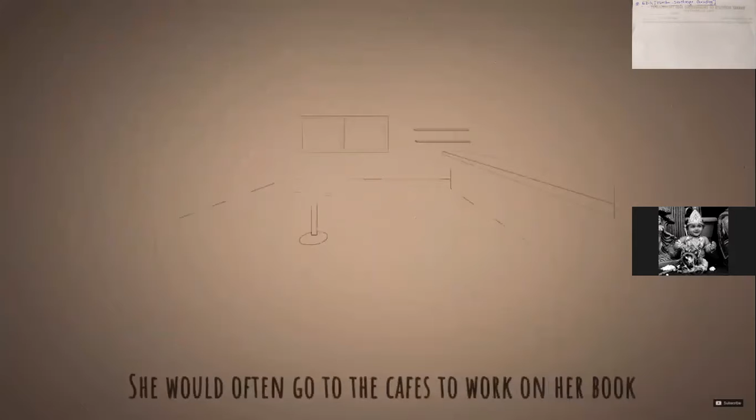To write fantasy novels. She would forget about everything while sitting at her desk, and so she started writing more and more. She would often go to the cafes to work on her book while her child had a nap. Although she couldn't even afford food at the cafe, she only ordered one cup of coffee during her writing sessions, just so the cafe owner wouldn't kick her out. Somehow this way she finished the first 3 chapters of her novel.

She sent the story to a publisher, but unfortunately, they quickly gave her a pass. She sent it to another publisher, but again, the answer was no. Her mailbox was filling up with rejection letters. After sending her story to 12 different publishers and getting rejected by every single one of them, she began losing confidence in her book.

Finally, one day, the editor at Bloomsbury Publishing Company sat down to read the story. Fortunately, her 8-year-old daughter was there too. The little girl loved the opening chapters, and she was very curious to read the complete story. This made the publisher agree to publish her book, but the publisher also advised her to find a full-time job and said that she wouldn't make any money writing fantasy stories for children.

In June 1997, at the age of 31, her first novel, Harry Potter and the Philosopher's Stone, was published with an initial print run of 500 copies. When readers tasted the story, the demand for her books began to rise dramatically. 5 months later, her book won its first award, the Nestlé Smarties Book Prize.

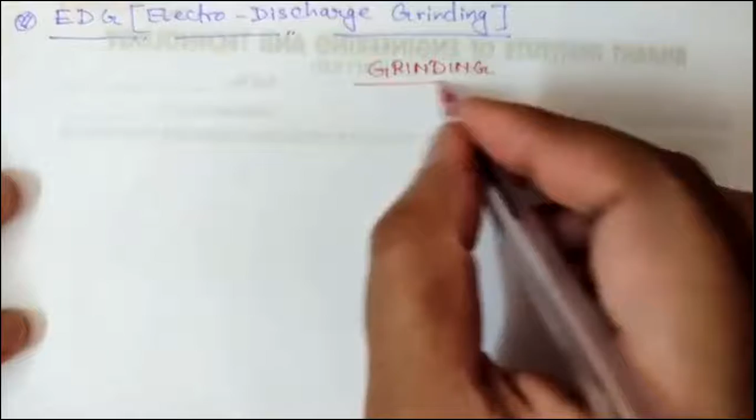Okay, so then you will get this answer, right? So if we talk about grinding, we can classify it into two categories. One is conventional, another one is non-conventional.

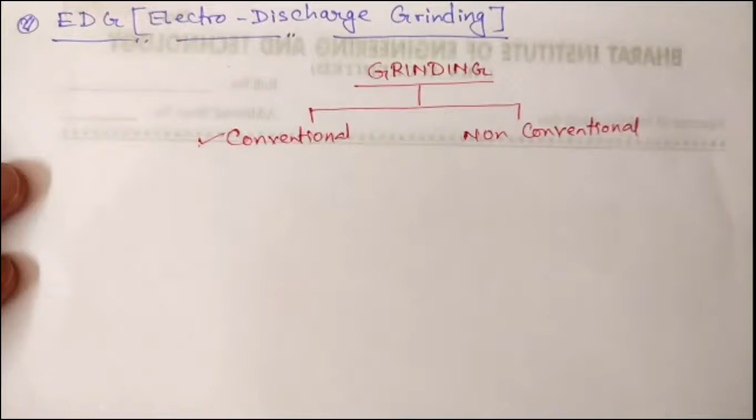Now, in conventional grinding, already you have studied in the previous semester that we have different types of grinding processes. You might have already studied about the grinding wheel, as well as the specification of the grinding wheel.

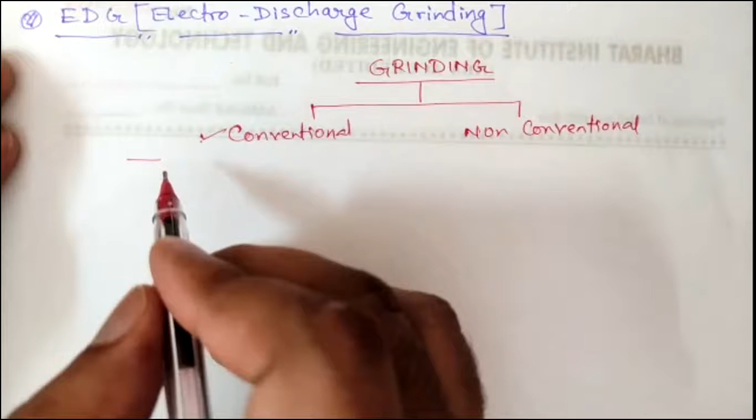Like you have studied about surface grinding machine also. I feel you people studied it, yes or no? Hello? Anybody? Can anybody tell? Sir, your voice is low. Can you hear me now? Hello? Yes, sir, so did you study about conventional grinding process? Have you studied?

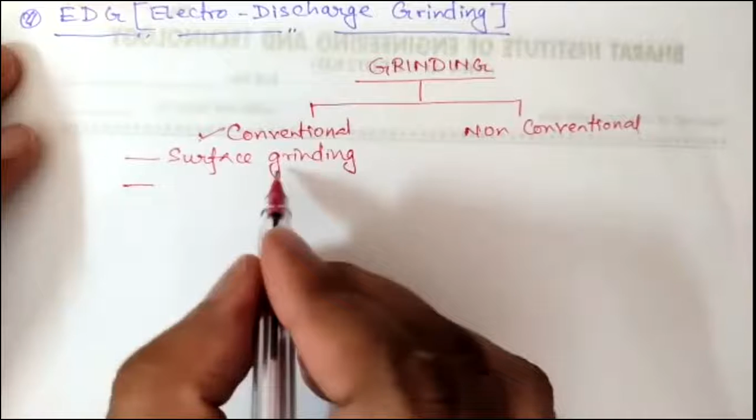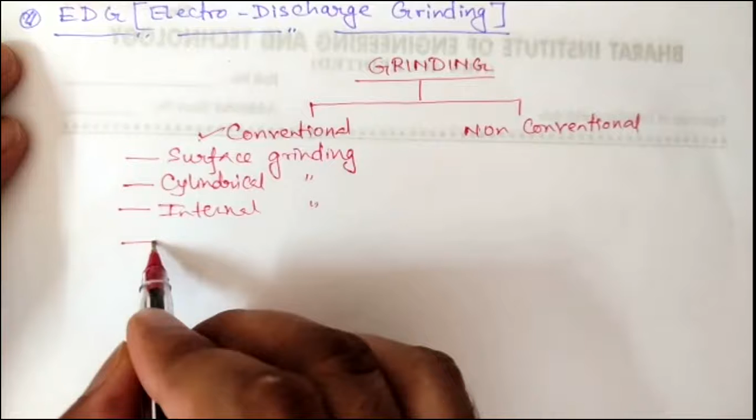So in conventional grinding process, which you people might have studied in previous semesters, we had surface grinding, then cylindrical, then internal grinding, then something called centerless grinding. Did anybody know centerless grinding? Did you study it? It is a very important question for your interviews. Then many are there like gear grinding, contour grinding, thread grinding, etc.

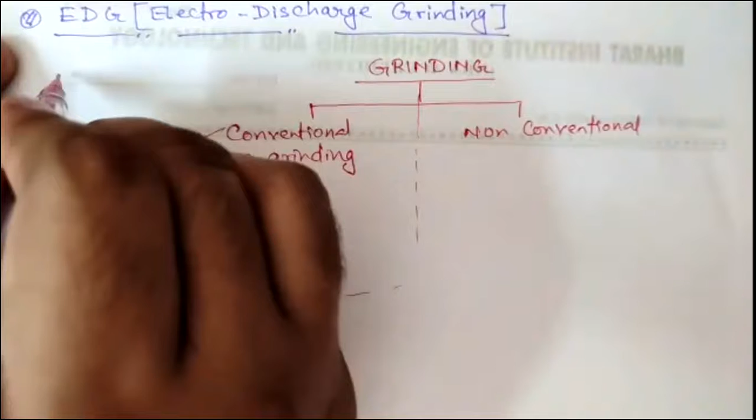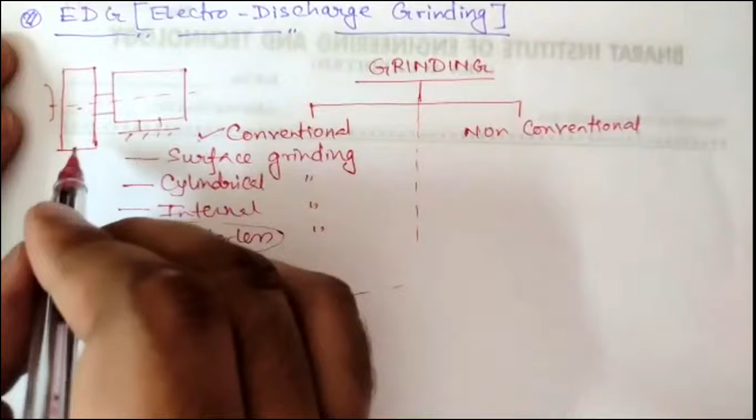Many are there. So in those processes, we found that we have one grinding wheel, and we connect this grinding wheel with one motor. Once the motor is rotating, this grinding wheel also will rotate, and we are going to place any object.

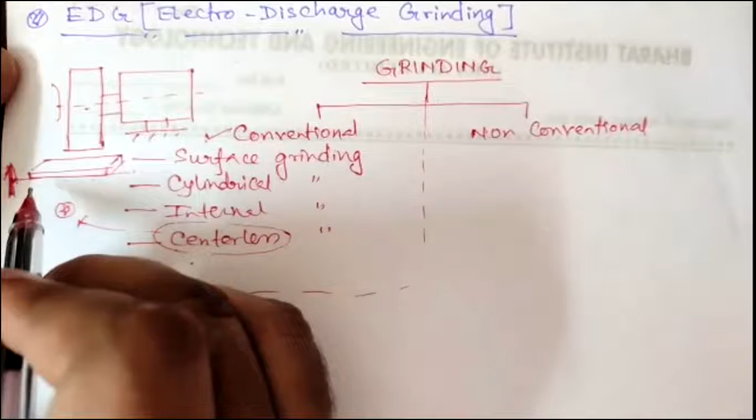Say in case of surface grinding, we are going to place a workpiece, and we are going to fix it with some fixtures, and then keep it on a table. This table will have some feed mechanism. By bringing the table up or moving it up, this surface will be in touch with the grinding wheel, and in the grinding wheel there will be many abrasives present, which will start removing material from the top of the workpiece in the form of powders or debris.

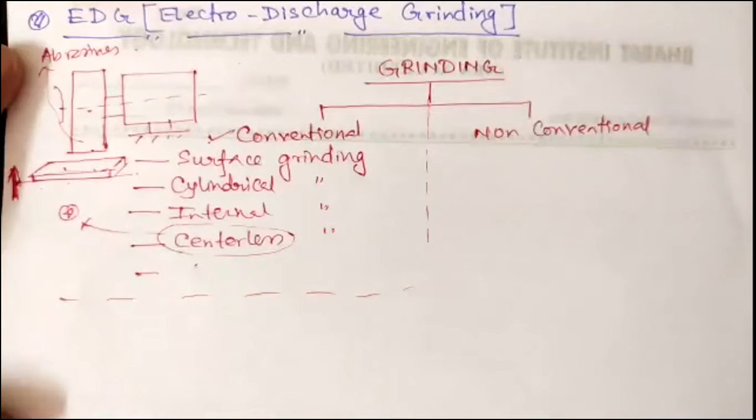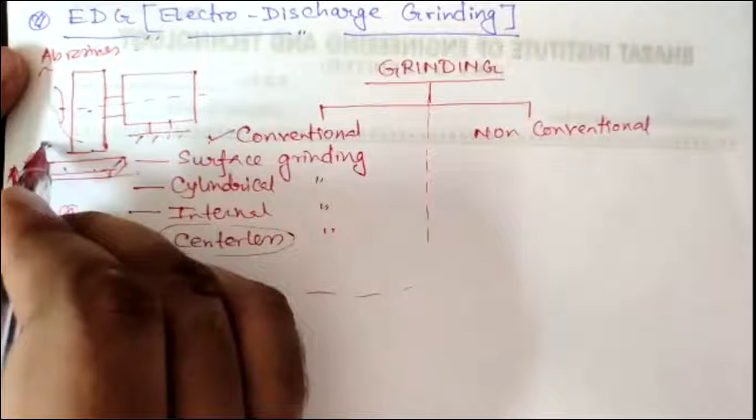And in this case, we found the material removal rate was also very low, as we are not going for direct machining process using single or multiple point cutting tools. It is mostly used for finishing operation. So those things we might have studied in grinding. Now, this table will have XY feed as well as Z feed. These things you might have already studied in previous semesters when you studied about the machine tools subject.

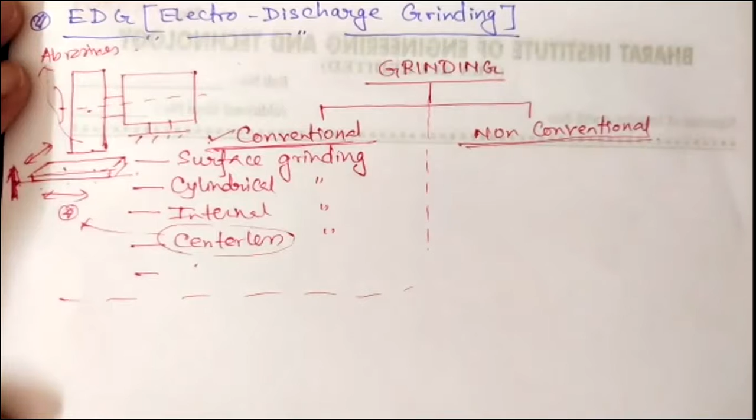So these all are about conventional processes. But there are some non-conventional techniques also, where we use a grinding wheel attached with some non-conventional or unconventional machining system. This is sometimes called hybrid grinding also. What did I say? Hybrid grinding.

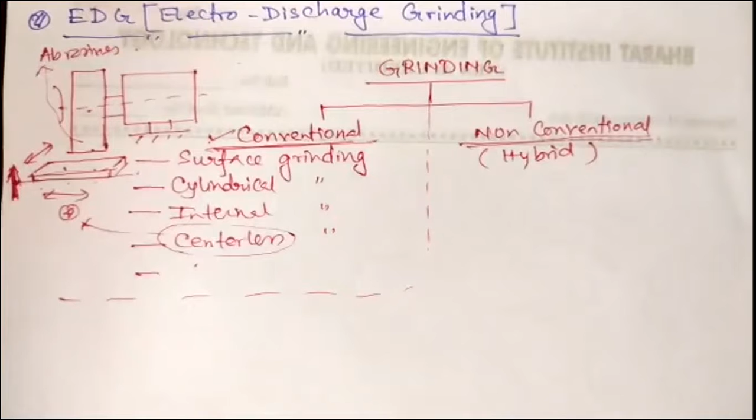Now what are the different hybrid grinding systems? I have already discussed that there are many hybrid grinding systems. So in hybrid grinding system, the first one which we have studied this semester is ECG, or electrochemical grinding process. Now after electrochemical grinding process, ECG, we have got EDG also, that means electric discharge grinding process also.

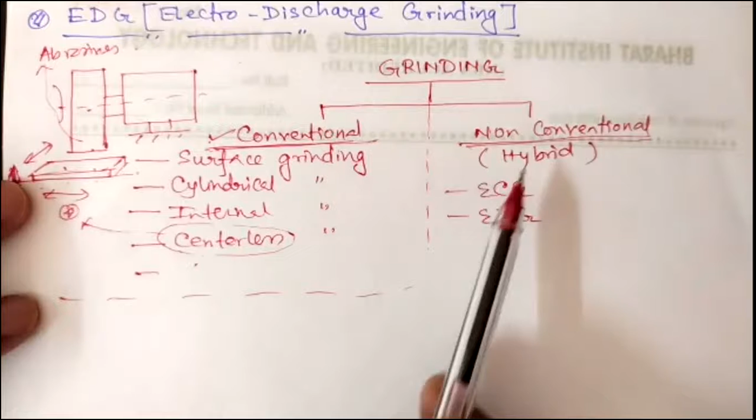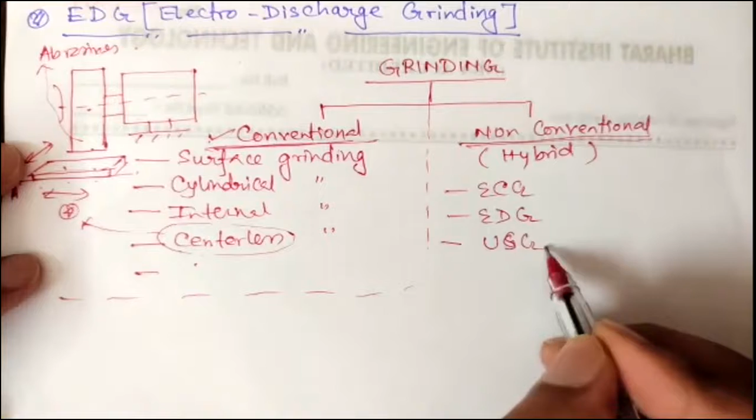So in hybrid grinding process, we will have the mechanical kind of grinding process along with any non-conventional energy source. So as I said, we had ECG. Then we have EDG. Then we have got USG, ultrasonic grinding, that is also possible. Then here only in EDG, another one is there, called EDDG, that is electric discharge diamond grinding. So these kinds of things are there.

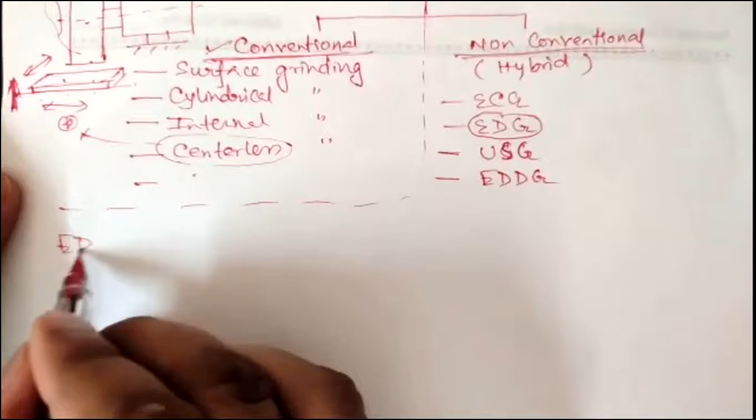Now we are going to study about EDG, or electric discharge grinding process. So EDG, or electric discharge grinding, is the process which works on the same principle as EDM.

So here we are not going to have the tool like we used in normal EDM process. We are going to use a grinding wheel, or rotating wheel, which will be made of electrically conductive materials. In general we use graphite in place of tool, right? Now a part of the grinding wheel and the workpiece will be immersed in the dielectric and will be connected to a pulsed DC supply.

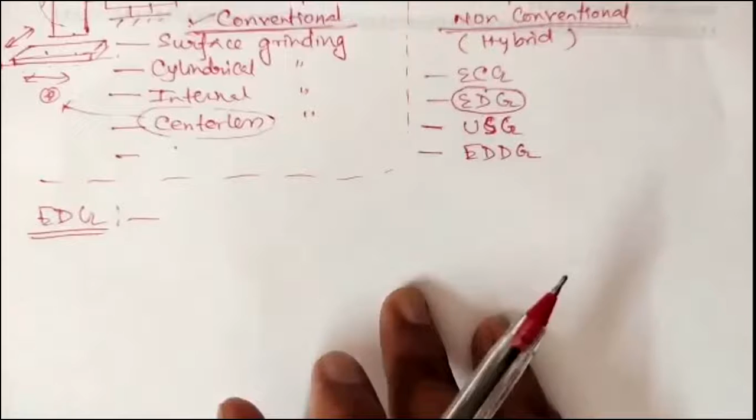Now let me draw the circuit diagram of EDG, and then we will be able to discuss it. Anyhow, I'll finish some discussion on this page, and on the next page I'll draw the diagram, so that you can understand it in a better way.

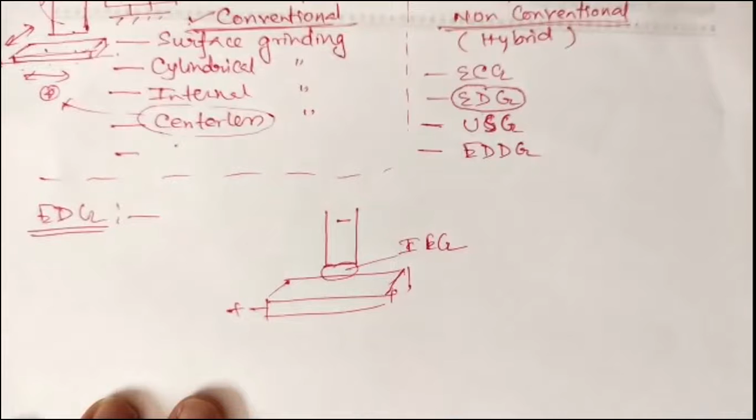So what we found in EDM is that we had a tool which was connected to the negative terminal, and we had a workpiece which was connected to the positive terminal of the power supply, and here we maintained some interelectrode gap, IEG. And the mechanism I have already said, that electrons will start moving to this side, and here we'll have presence of dielectric.

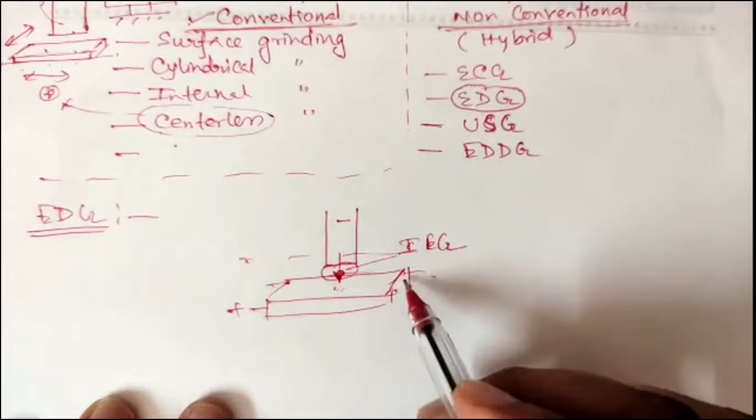So these free electrons, which are moving, will be ionizing the ions present in the dielectric fluid, and will make a plasma channel, and hence it will allow the electrons to flow in this direction, and that will strike on the surface, and generate some heat, produce some heat, and then it will melt the workpiece and vaporize it. So these things I have already mentioned in the EDM process.

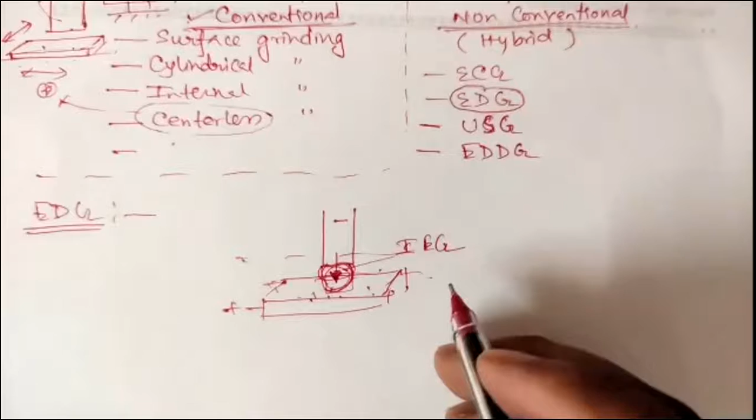So here also we are going to have the same kind of thing, but in place of this conventional tool, we are going to use some grinding wheel. Why do we do it? Whether we require any sort of abrasive to be present on the grinding wheel or not, that also we are going to study.

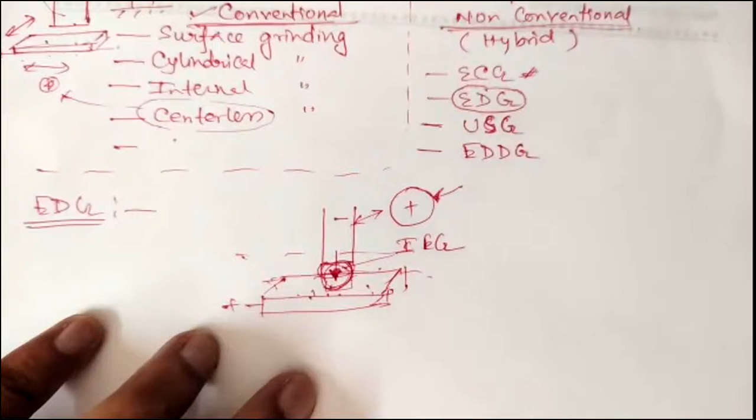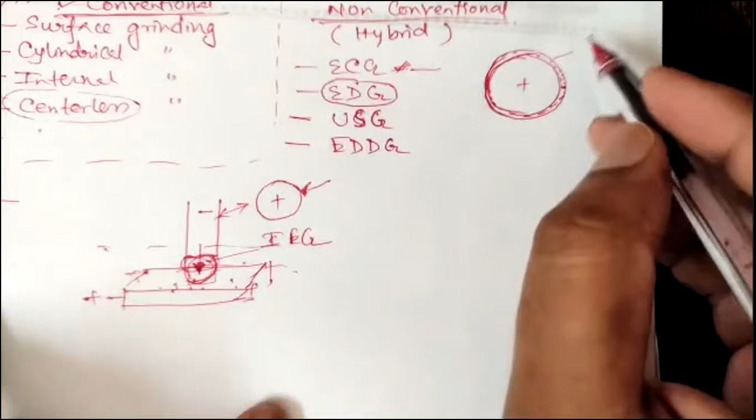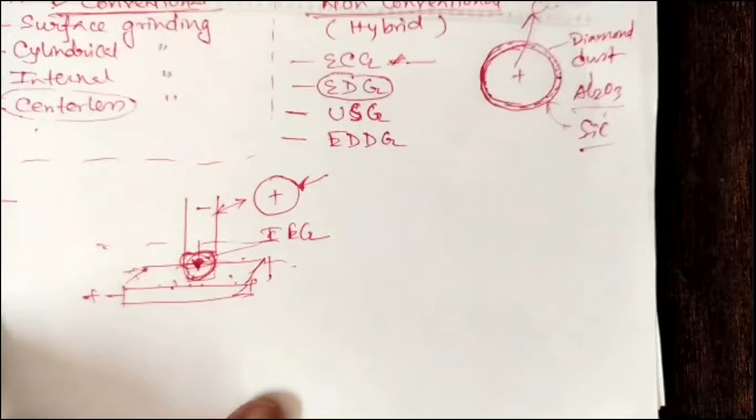And this insulating chamber was filled with some abrasive particles like diamond dust. Then we had Al2O3, etc. So these kinds of things, silicon carbide SiC. So these abrasives we have kept on the outside of this. That means this was made of conductive materials, because in this ECG process also we require electricity to be passed, or there should be some flow of electrons. Otherwise it will not work. So this process we have studied in ECG.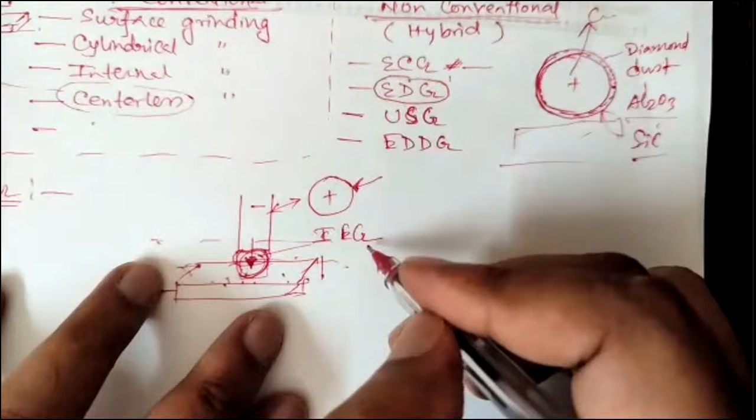But in case of EDG, we are going to have a similar kind of grinding wheel, which will definitely be made of electrically conductive material. But in this case, we are not going to use any kind of abrasives. Now you will be asking, sir, then how does it become a grinding process? In the previous case we used some abrasive particles, but in this case there is no presence of abrasives, and still we are calling it grinding.

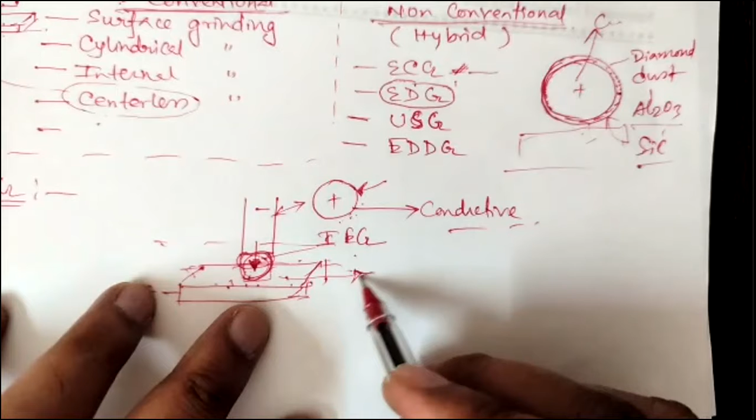In case of EDM process, the material removal was very low. Materials in the form of debris were coming out from the workpiece. So in this case, whether we are going to have more MRR, less MRR, or similar kind of MRR, then why is it called grinding? Just because we have used one wheel in this case, like a grinding wheel.

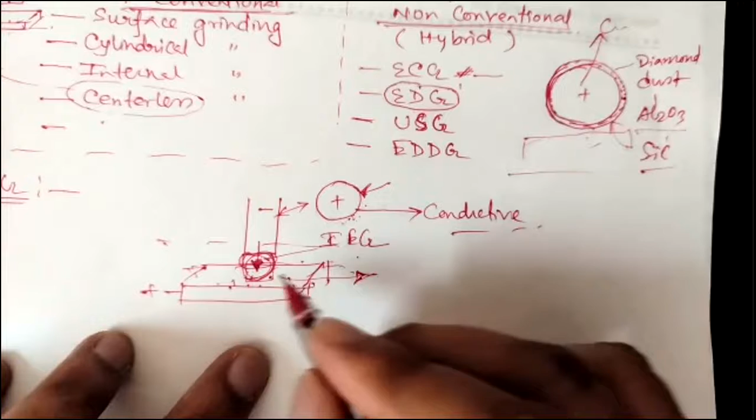So in this case also there is no much difference. But one difference is, in the previous case we have used some flushing mechanism, so that the plasma channel will be broken, and from here everything will come out or be flushed out, which is a very important property in case of EDM. This thing I have discussed already.

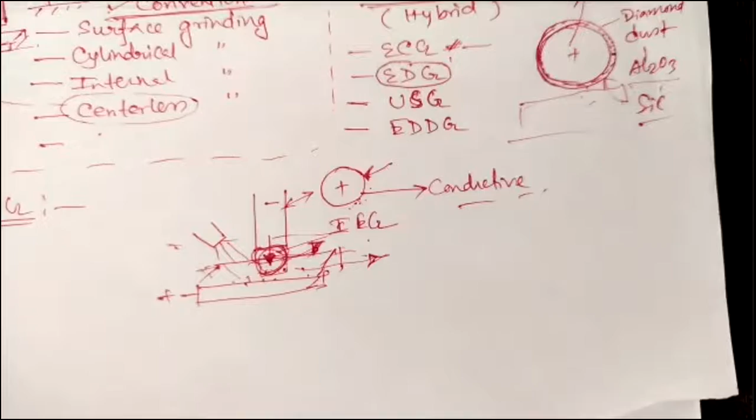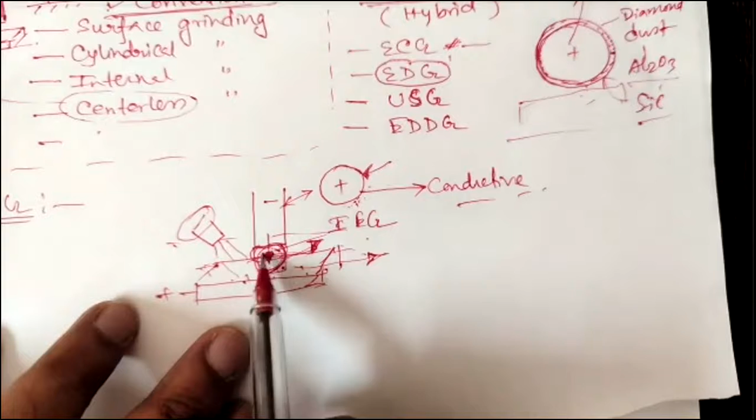So flushing plays a very important role in EDM process. But here, in case of EDG, we are not going to use any flushing mechanism. Then you will be asking, sir, how are we going to replace these things, or flush away all these particles if there is no flushing technique? So in order to achieve the flushing, we have produced this grinding wheel. So this grinding wheel will not only rotate, it will act as a supplementary of the flushing mechanism.

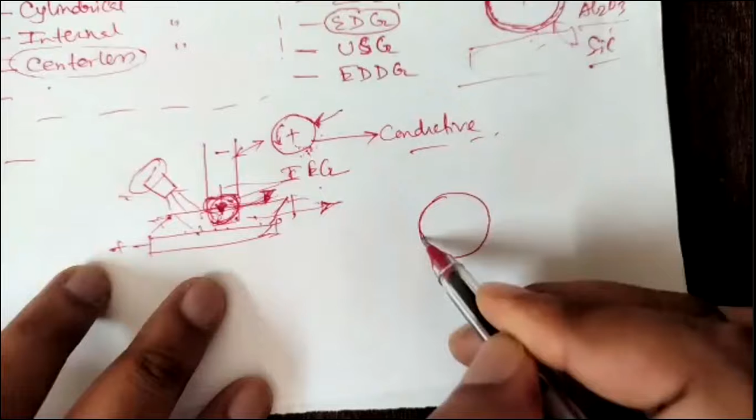Now let us try to understand how it does this. Suppose this is one wheel, and in the wheel you have got some threads kind of things like gear teeth. Now here we have the center of the wheel. Now what you have to do is keep one chamber, which will be filled with some liquid. Then immerse it on it, not fully, partial immersion, like this much. This much portion is immersed already.

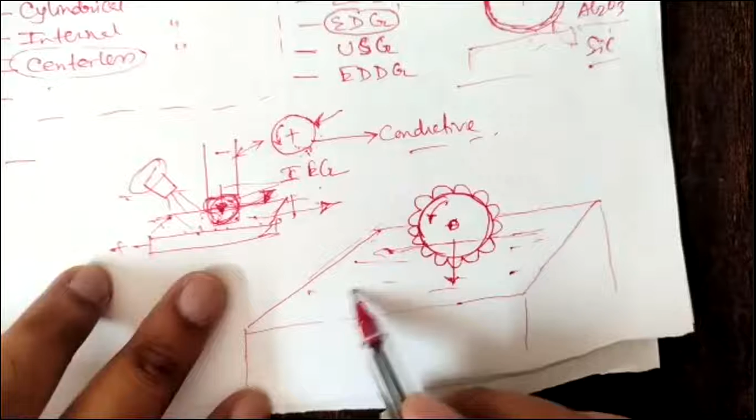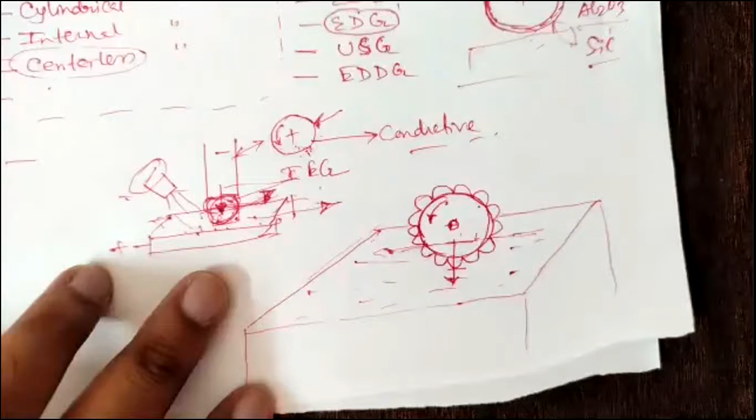Now, if we rotate it, what will happen? Can anybody say? Suppose here you have got water or any liquid. And you have this kind of profile on a wheel, and you are immersing it just a little bit, this much amount, for example here to here, onto the liquid. And you want this wheel to be rotated either in this direction or in this direction. Then what can you find, or what will happen in this passage? Can anybody say? Can anybody respond?

Actually, this one I was simply discussing, I'll draw a big diagram only. Okay, someone has already told more size. I'll draw it. So in this case, what will happen? Can anybody respond? No response. Anybody listening to the class? Yes sir, you're listening. Only you will be listening. Listen, Manideep.

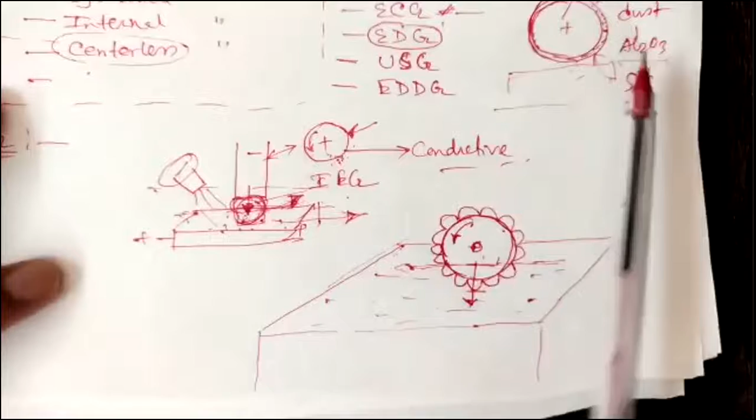Okay, Manideep, you tell what will happen in this case. You understood? Say here you have got some water. Now you have got a wheel which has got some thread twist like this, and the wheel is rotating in this direction, say anti-clockwise direction. Then what will happen? Can you tell?

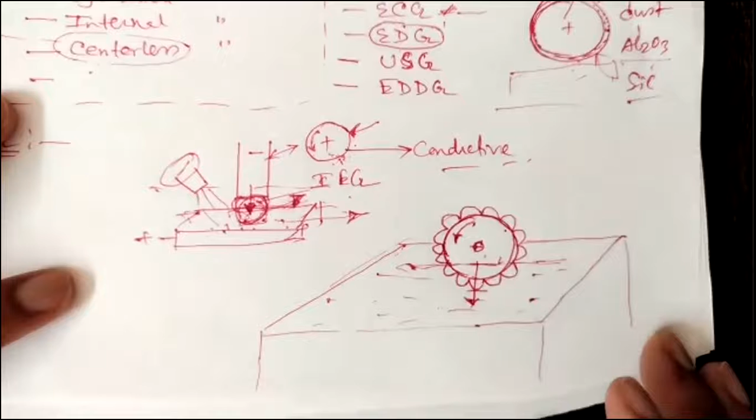This wheel is a grinding wheel, no sir? Forget about grinding wheel, any wheel. Forget about grinding. Some wheel, okay, I am rotating it and I have immersed it into water. Then what is going to happen? The water is going up, sir. Some amount of water is going like this, if in this clockwise direction.

I have shown it is anti-clockwise direction, in this direction, say it is rotating. Yes sir, the wheel is rotating anti-clockwise, no sir. So water, some particles of water, is going in a clockwise direction. Particles of water will go in clockwise direction.

If you have anything with you, suppose some rotary type of thing in your hand, just try it. Take a mug of water or a bucket, take some water and then rotate it. Will you not have some automatic flow of water in this direction, or will the water start to flow in this direction or not? Tell me. I am rotating the wheel in anti-clockwise direction. Yes sir, water will flow in this direction. It will happen, water will flow. Yes sir, water will flow, sir.

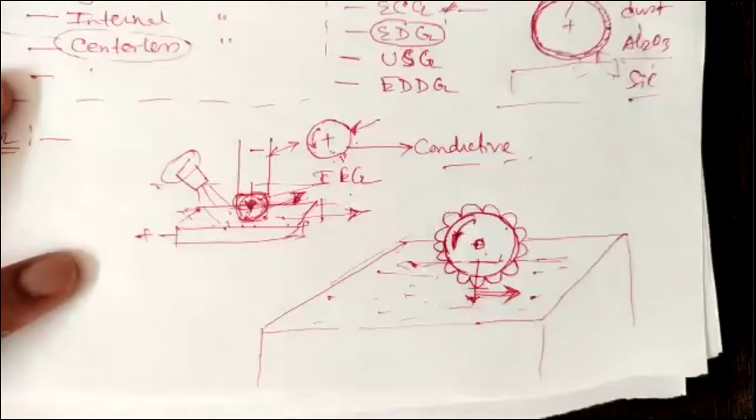But I want this only, so this change you will observe. Don't go in deep, this is a very simple thing. I have some water, now in that water you have immersed a wheel, or something which can rotate, and then you have given some rotation. What will happen? The water will move in this direction, it will start flowing. Yes sir. Now in this case, what did we do? If any plasma channel is formed, what was happening?

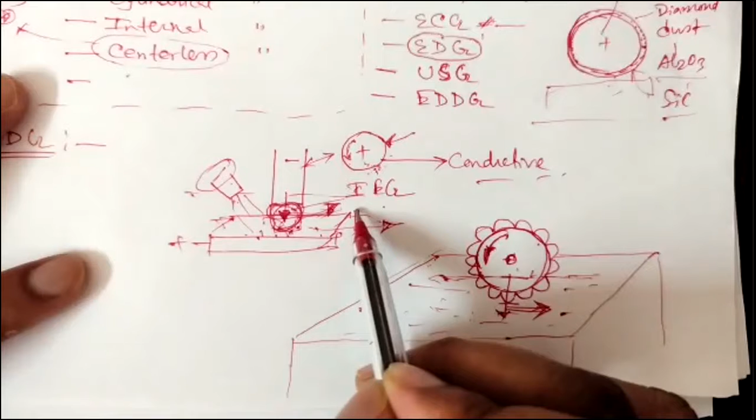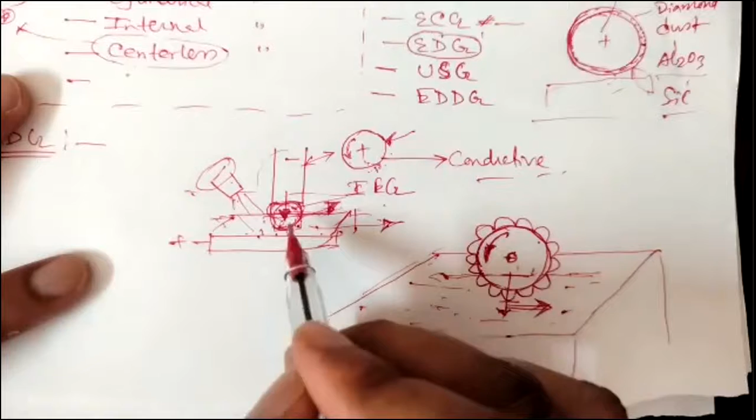This flushing technique, where we use one nozzle, was flushing away all these machined particles, because here we don't have any other mechanism. But if we place one wheel here, rotating either clockwise or anti-clockwise, what will happen? Automatically the dielectric or all these particles will be flushed away. This is the difference you will observe between EDM and EDG.

Now I will draw the schematic diagram of EDG, and then one by one I'll explain once again.

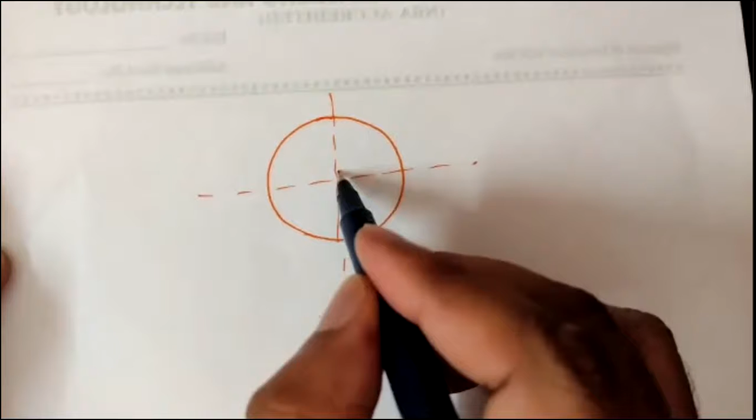So first and foremost, our requirement is to have a wheel, a grinding wheel. Then the second requirement is we must have a workpiece.

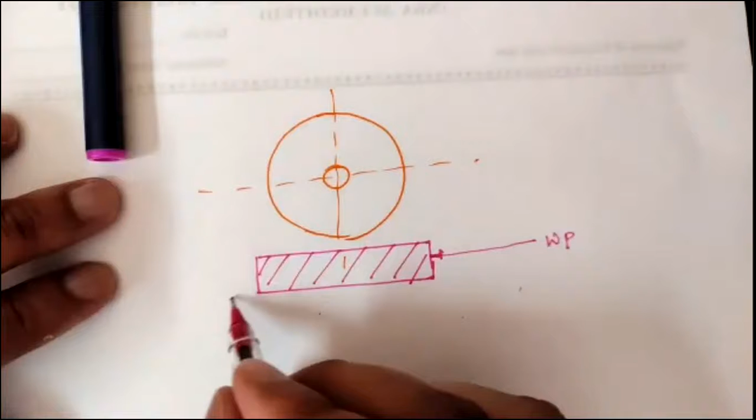In exams, it is very important that you draw all diagrams neatly and cleanly. This workpiece will be mounted on the table with some fixture. So this is the table, or work table.

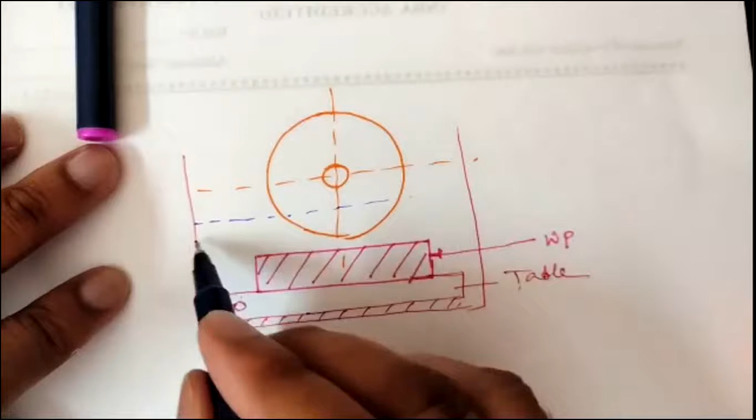Everything must be immersed into a dielectric medium. So we are going to have some dielectric present on it. This is the dielectric.

Now what next? This wheel, for rotation, must be connected with some rotary mechanism, maybe a motor. So we will have a rotary mechanism.

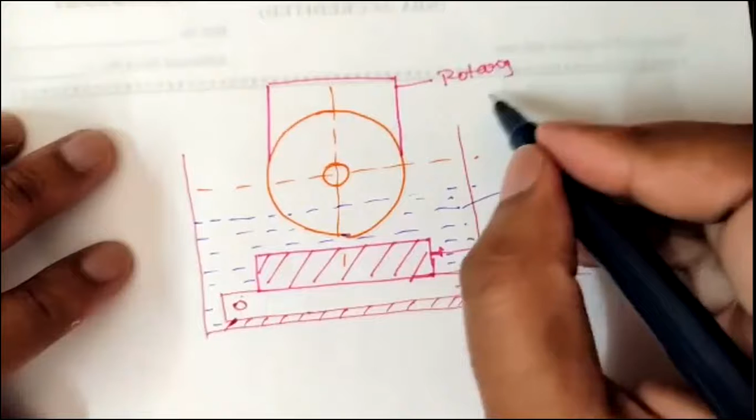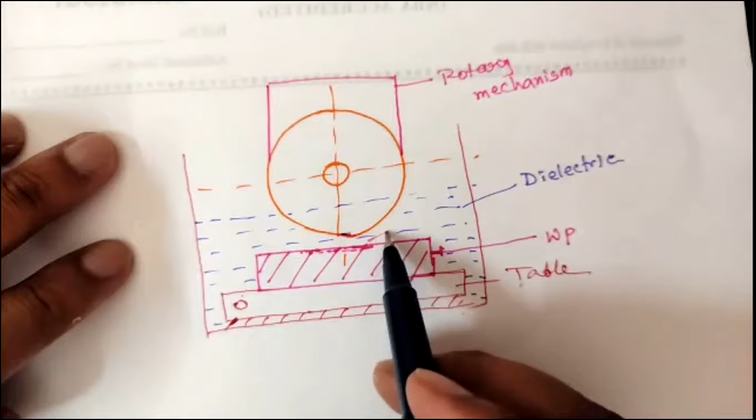It should not only rotate. It will be removing some portion or amount of particles, some debris, and some material from the workpiece. Then the next layer has to appear. So for removing that next layer, we need to maintain the same inter-electrode gap, IEG.

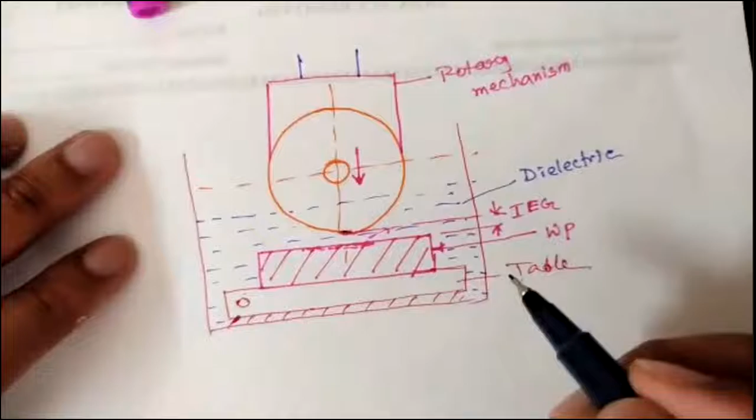So in order to maintain that gap, what we need to do is give some feed to the tool, that means the grinding wheel. To perform this, you have to connect it with some feed mechanism, and to feed it correctly, you need to install some servo system which will have this up and down motion.

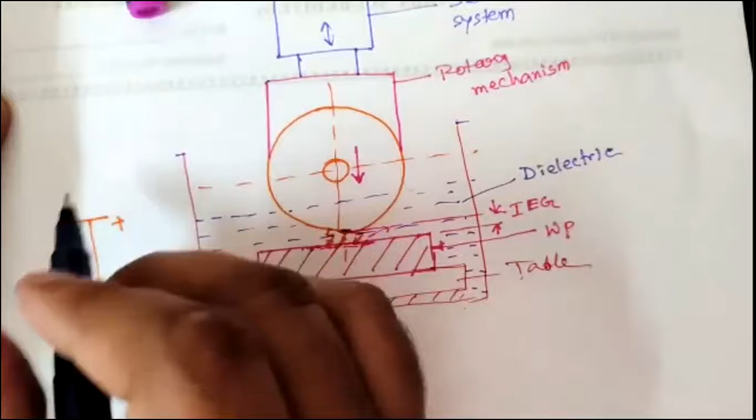Now everything we require, we have mentioned. Spark generation will be taking place here, somewhere here it will generate spark. Now, in order to generate spark, our goal is to connect the table or workpiece with the positive terminal of the DC power source, and the grinding wheel with all the mechanism must be connected to the negative terminal of the power source.

We are assuming here that the grinding wheel is rotating anti-clockwise, but that is not necessary — it can rotate clockwise too. So here we have the unit, which is the pulse generator.

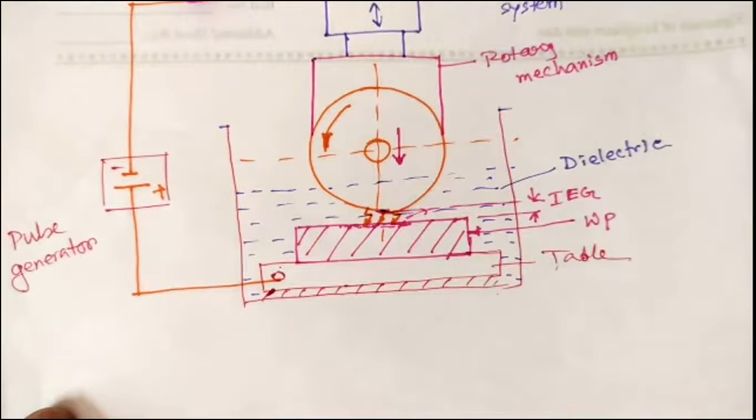Clear? Now I hope you people have drawn this diagram, or shall I wait for some more time? Once you have finished drawing the diagram, then tell me.

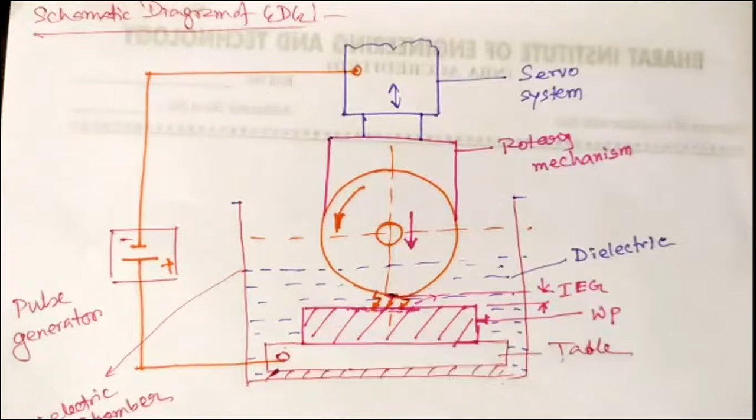Yes, the table will be fixed to the dielectric fluid chamber. This is the dielectric chamber, the table has to be fixed. Actually, this will be the complete setup we will be having.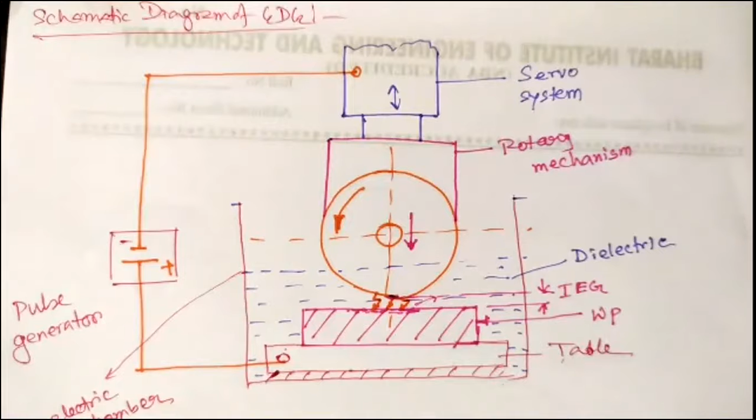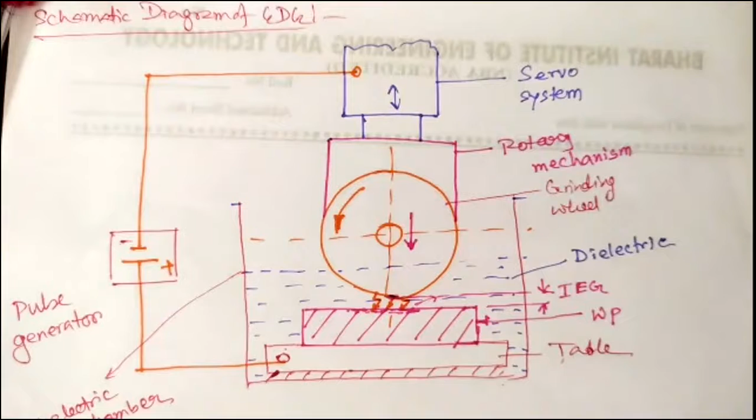Once you finish drawing the diagram, then inform me. I hope you people have finished it. Okay, right.

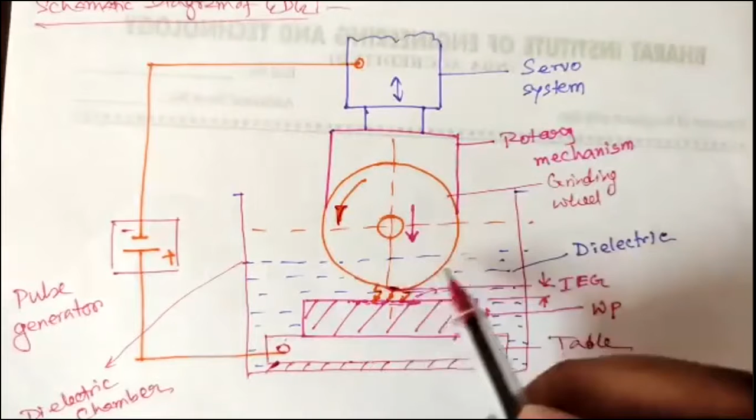Initially the dielectric is not flowing at all; it is simply kept in this chamber. Now, as I said, once the wheel starts rotating, it will start giving flow to this dielectric in this direction. So the dielectric will move in this direction, and this flushing work it will do automatically. The remaining working principle is the same as I mentioned.

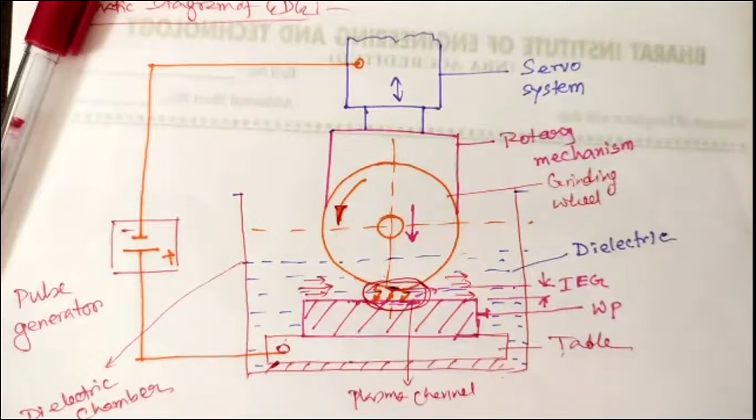So in this zone, we are going to have a plasma channel. This rotating motion of the wheel will ensure the effective flow of dielectric in this inter-electrode gap, and hence the flushing of the gap with dielectric medium can be eliminated manually — that's the previous mechanism I already mentioned.

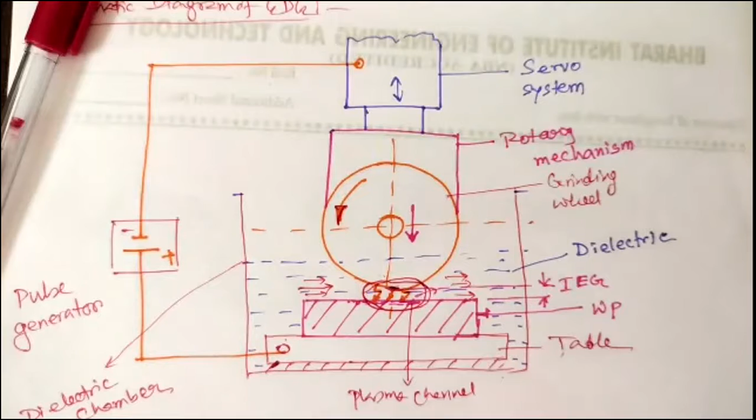But here we can find that there is no direct or physical contact between the tool and workpiece, and because of that, fragile and thin section workpieces can be easily machined.

EDG is somewhat economical compared to conventional diamond grinding. When we go for conventional diamond grinding, it's for harder materials. But as mentioned in previous classes, in EDM or EDG, irrespective of hardness, we can remove materials. So we can remove the diamond wheel — diamond is not required in this case, which saves the cost of machining.

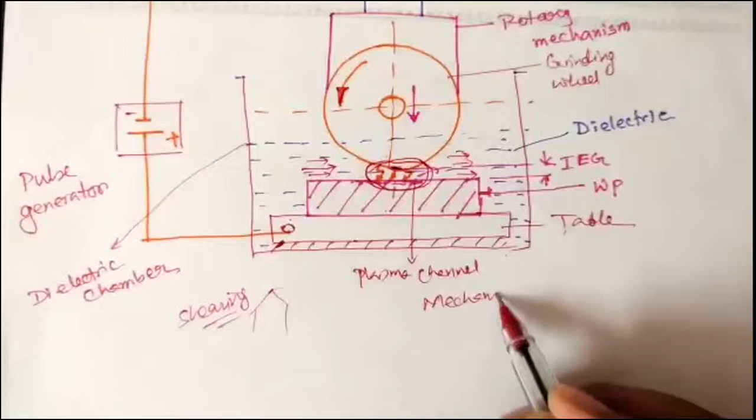During EDG, material removal takes place due to melting and vaporization, but no mechanical action is present. It will not be there like we generally find in case of single point cutting tool or conventional tools, where the mechanism is shearing. Here the mechanism is melting and vaporization.

EDG also can be used for dressing up metal bonded diamond grit grinding wheels. Remember it, what I'm saying - EDG can also be used for dressing up metal bonded diamond grinding or diamond grit wheels.

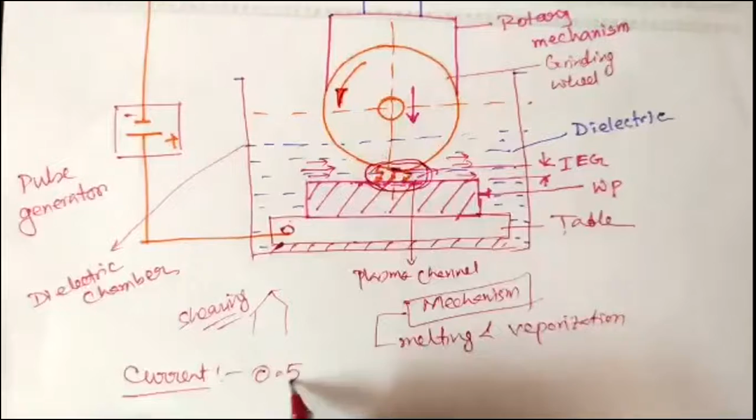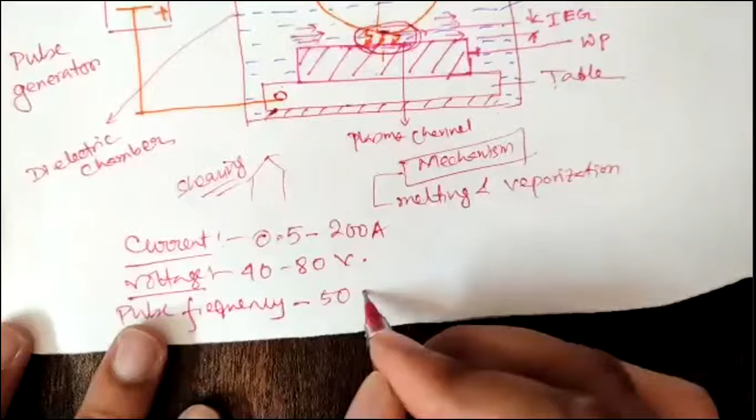In EDG, grinding wheels will not have any abrasive, as I said. The current which has to be supplied can range between 0.5 to 200 ampere. The voltage can range between 40 and 80 volt. And pulse frequency can be somewhere in between 50 to 250 kilohertz.

To achieve the desired MRR and surface finish, we need to choose optimum process parameters. For this, many research papers are available, many research works are done. You can find many optimization techniques, already discussed in previous classes.

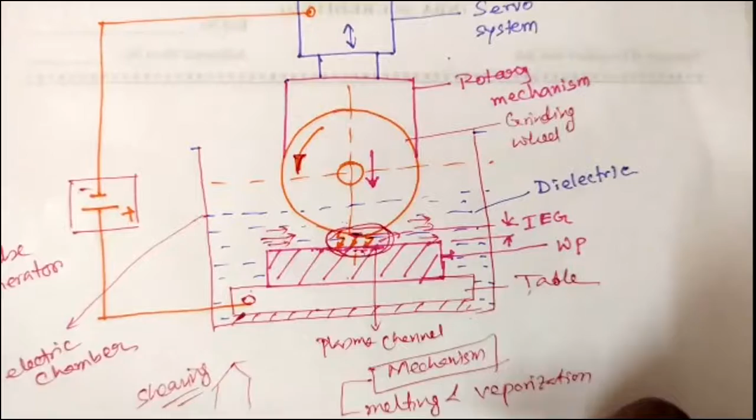The servo system is very useful in order to maintain proper inter-electrode gap or IEG. If debris somehow blocks the gap, the wheel is retracted or moved up, so that we can have some more gap, and once again we can have this dielectric chamber.

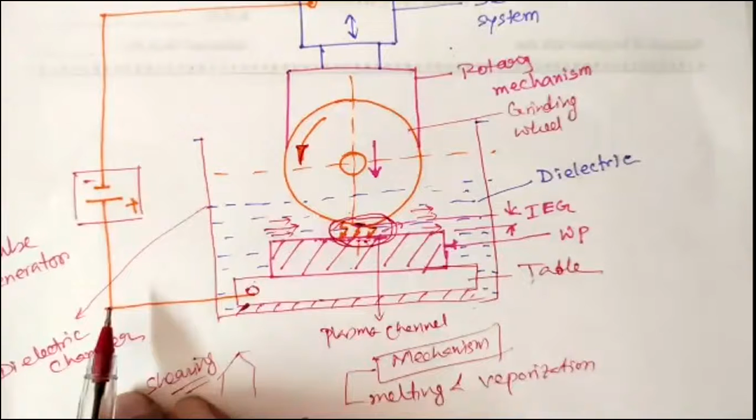EDG is capable to machine extremely hard materials. You can even machine carbides. Generally conventional grinding process will take some time, but with the help of EDG we can make it faster. Carbides, which are very hard, can be machined using EDG.

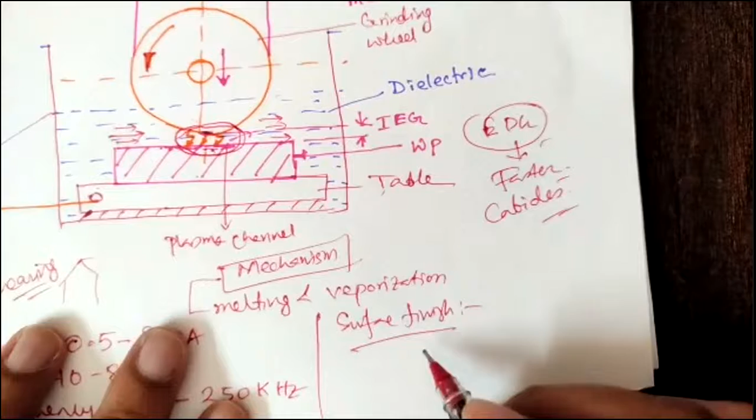In this process, surface finish or surface roughness can be very good, somewhere around 0.2 to 0.3 microns. And accuracy may be somewhere in between plus minus 2.5 microns. So these are a few data which we generally get from all the experiments in EDG.

I hope you people understood what is EDG process. Next class I will be discussing about wire cut EDM or WEDM, which is another important topic.